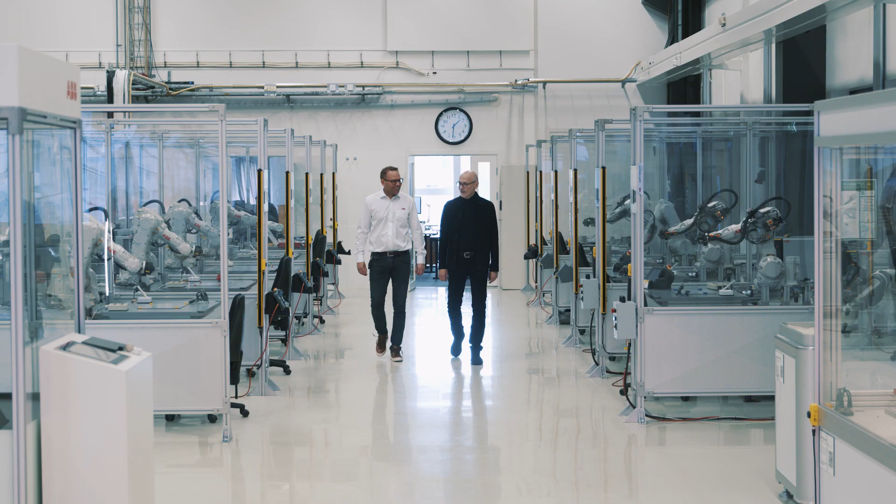Already when I was born, my grandmother expected me to become an engineer. There was this famous engineering school named Chalmers University of Technology in the city where we lived, and she had high hopes that I would attend it. And it so happened that when it was time for college, Intel released the first microprocessor, and I was blown away with it and wanted to learn everything about computers. So my grandma's vision became reality.

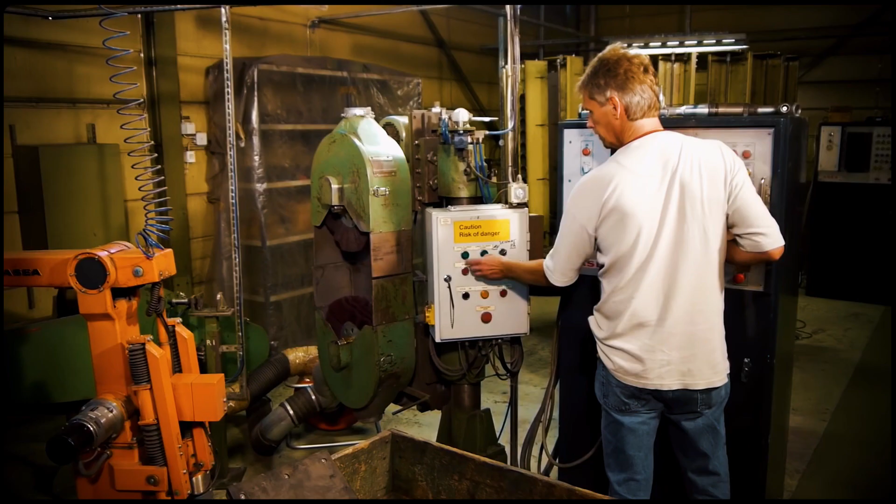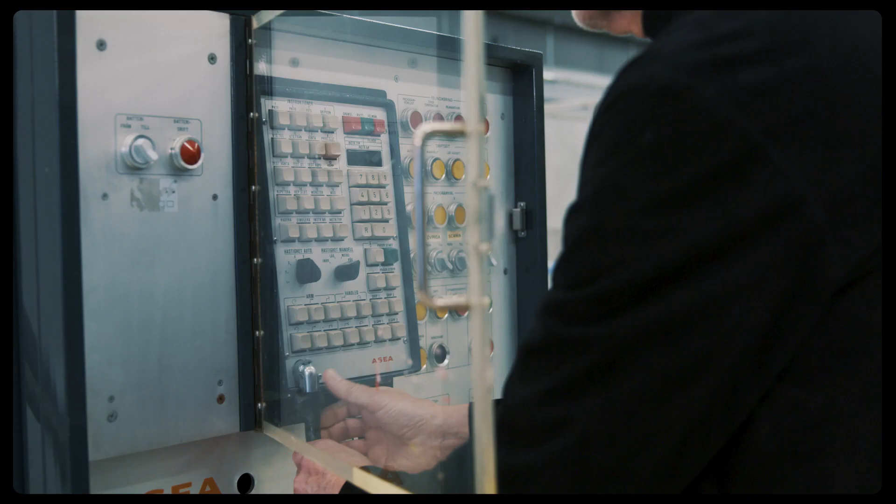I started out in the robot industry in 1976 when I joined a small team at ASEA in Sweden, now ABB, that developed the world's first all-electric microprocessor controlled robot, the IRB6. Although we had no PCs, no internet, and no mobile phones, we were able to create a robot that was not all that unlike the ones we make today.

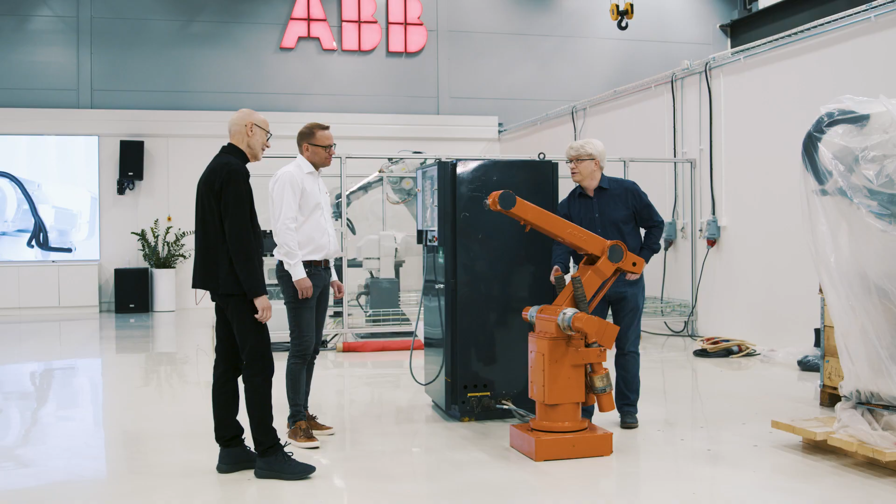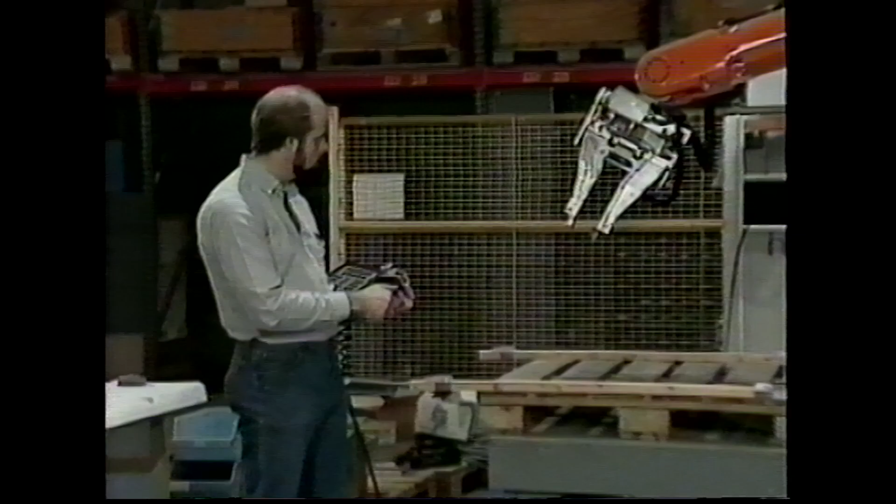After a few years as a developer, I left ABB to work with system integrators and end users in Germany, where I got a customer perspective on robotics. In 1985, I was recruited back to ABB to start an R&D department in Milwaukee, USA. There I had a chance to build a new team from scratch, something I really enjoyed and have been fortunate to be able to do several times again.

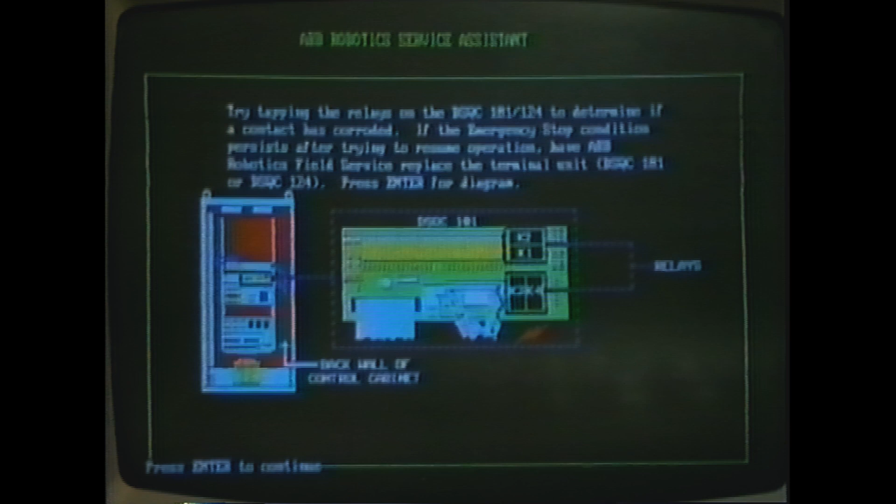We often hear that technology advances extremely fast, but I beg to differ. The things we were working on in the 1980s that we today would call IoT, digital twin, and AI are yet still just on the verge to become pervasive.

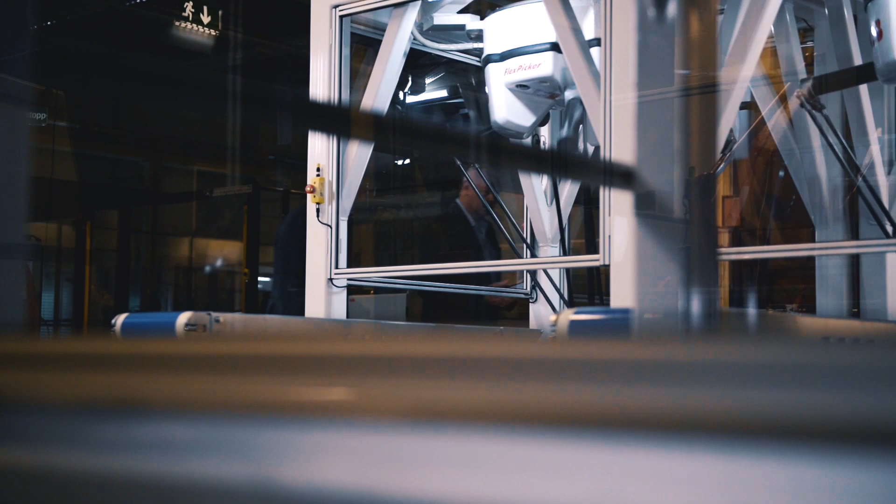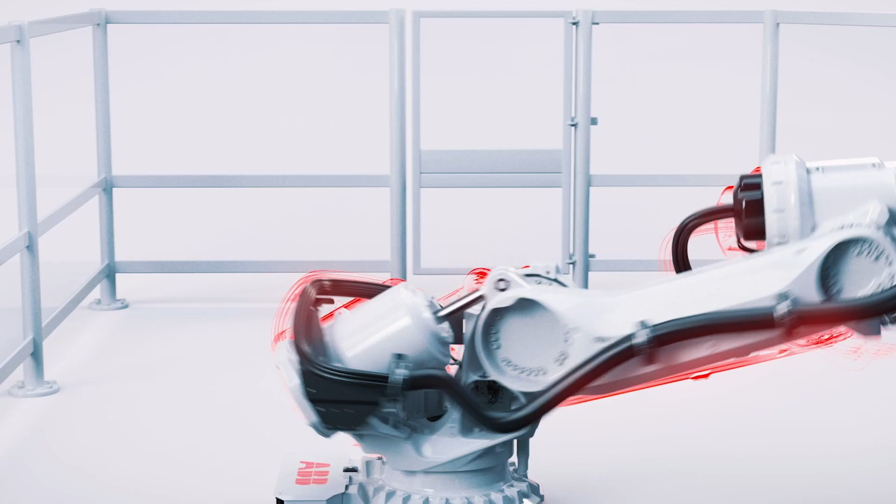After more than a decade in the US, I moved back to my native Sweden to start a new company named Digital Plant Technologies. The business idea was to develop tools to create what we then called digital replicas of real manufacturing systems. But we were out too early. It was too difficult to build digital twins of all the equipment in the factory. Often we didn't even have 3D models.

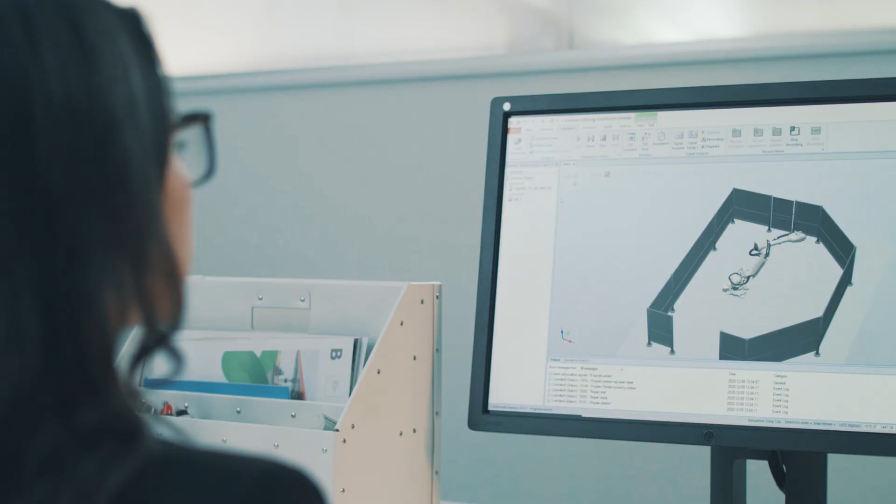So the company was acquired by ABB, and the scope was limited to ABB robot systems. We already had digital twins of these as a result of the work done in Milwaukee. We named the product RobotStudio, a trademark that has since earned respect among customers as well as competitors.

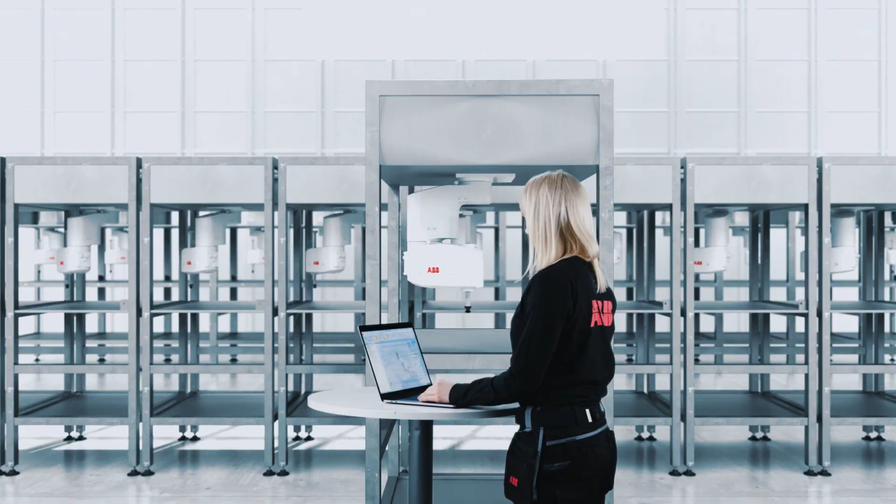The secret to success of RobotStudio is that it runs the same software that is running on the real robot controller. So what you see in RobotStudio is exactly what you get in the factory. That makes it possible to do virtual commissioning, designing, testing, and verifying a new manufacturing system in the virtual world so that the startup in the plant goes fast and you can quickly ramp up production to full capacity.

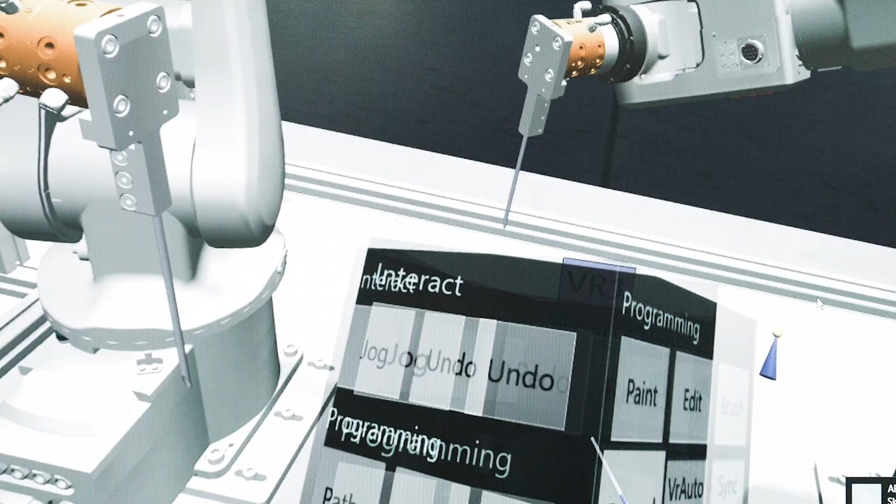Already when we first started to develop RobotStudio, we intended it to run in virtual reality. The technology was available, but was too expensive to be commercially viable. So RobotStudio was confined to flat displays for a long time until it could finally be released in 2016, when inexpensive consumer devices became available.

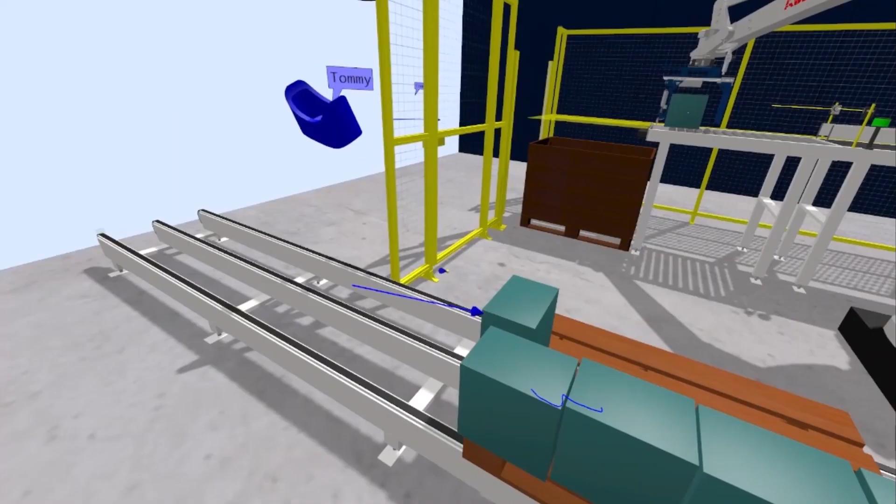In RobotStudio, we were early adopters of VR. A particularly useful feature has been VR meetings. That has made it possible for users in several locations, including from home, to meet as avatars inside RobotStudio to collaborate on robot solutions. An even more promising technology is augmented reality.

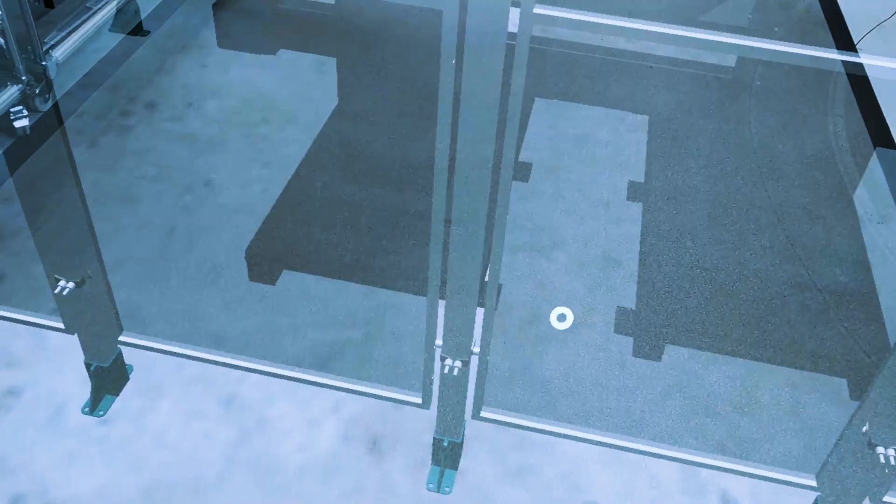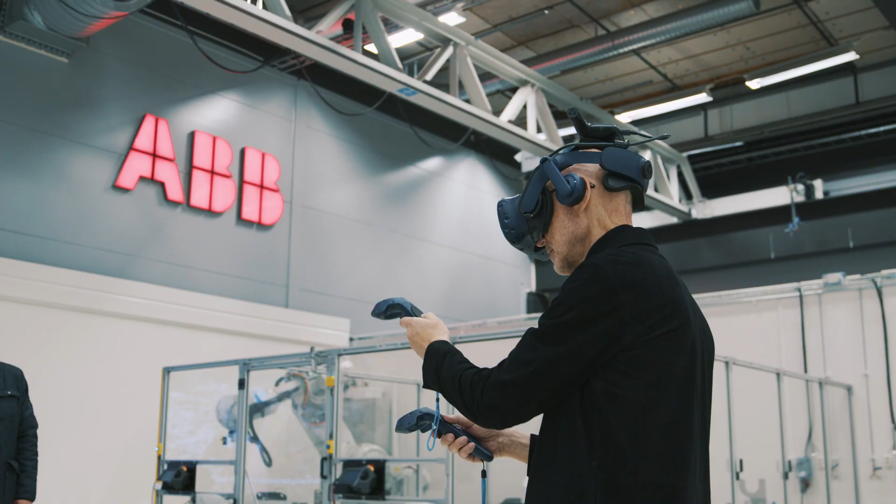Being able to visualize robot paths, work objects, and safety zones in the factory will make it possible to use RobotStudio with real robots in the same way that it is used with virtual robots. And devices such as teach pendants that today are physical can be replaced with virtual ones. Just to mention a few of all the new possibilities that the metaverse will enable. I am proud of what we have accomplished this far, and I am really looking forward to the journey ahead.